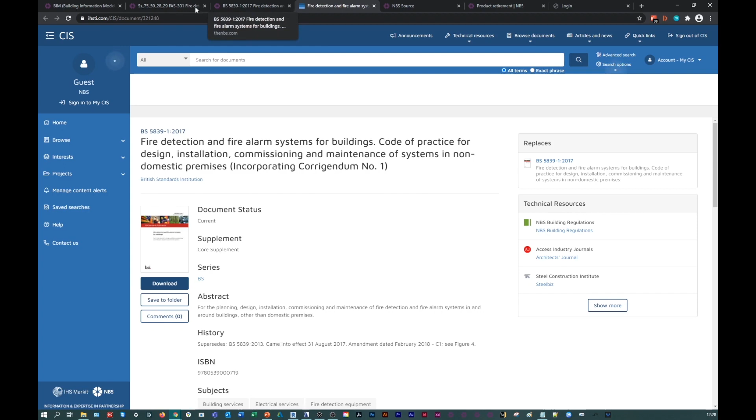You can also view older versions to see what's changed over the years in terms of those particular standards that are referenced. And if you click on this link to download it from BSI and you're logged in and have access to the Construction Information Service, this is a joint venture between IHS Markit and NBS, and we provide access to a number of the standards that are referenced across NBS Chorus and the content you'll find within there. So a really useful way of providing access to those standards and having visibility of some of the information available within the NBS Chorus content.

A couple of remaining things in terms of being able to publish this information. Lots of different ways to approach that. I know the previous webinar did look at style sheets and some of the publication options, so do check that out if you haven't already. But also to mention integration with things like common data environments. So if you have submittals mentioned in your content, they can be exported as tasks and deliverables to things like BIM 360, Format, and Viewpoint.

The final thing in terms of NBS Chorus, I think, is to indicate that there's a huge amount of help and support available. So as you are working through NBS Chorus, wanting some more information, there's support and knowledge base articles to help you through.

You can take e-learning modules that are available to you with an NBS Chorus subscription to learn how to use NBS Chorus. Any support that you need, you can submit tickets directly within the platform, but also the ability to suggest features. So when you think of something that would be really useful within NBS Chorus, you can suggest that to our ideas forum, and those ideas can be upvoted by other users to really inform the development of NBS Chorus going forward. And you can sign up to a newsletter to see what features, like the building and landscape import, are being introduced all the time into the platform.

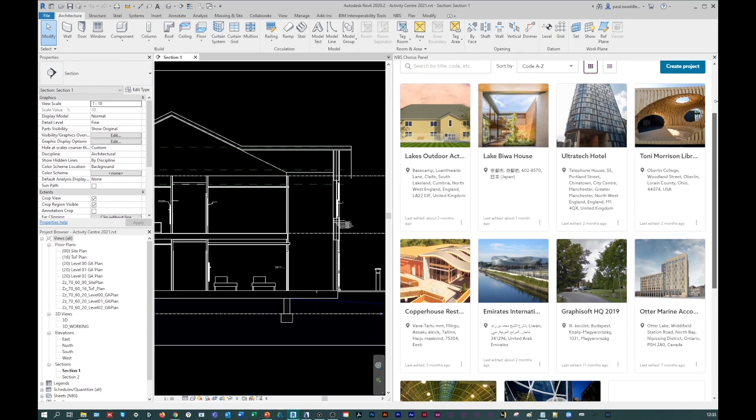The next thing to show you is some of the integrations available with NBS Chorus. One of the key aspects of the power of the platform is in the integrations. So here we've got Revit open, and within the Revit platform, we can now run NBS Chorus within that interface. This isn't like a separate plugin showing a read-only version of NBS Chorus and the specifications you're working on. It's exactly as we saw in the browser view, but with the ability to actually begin associating and linking the information between our model information and what's in our specifications.

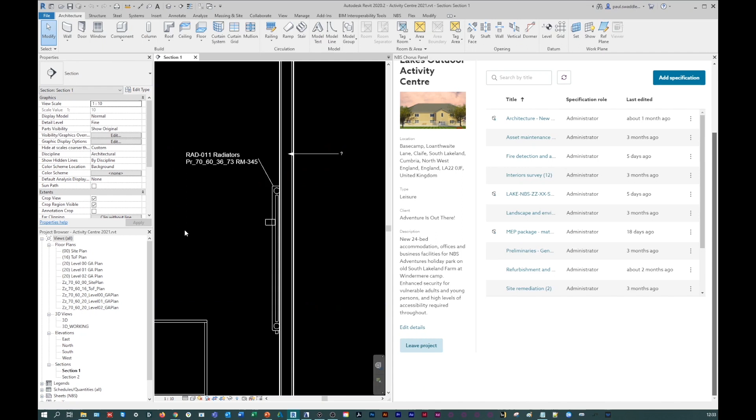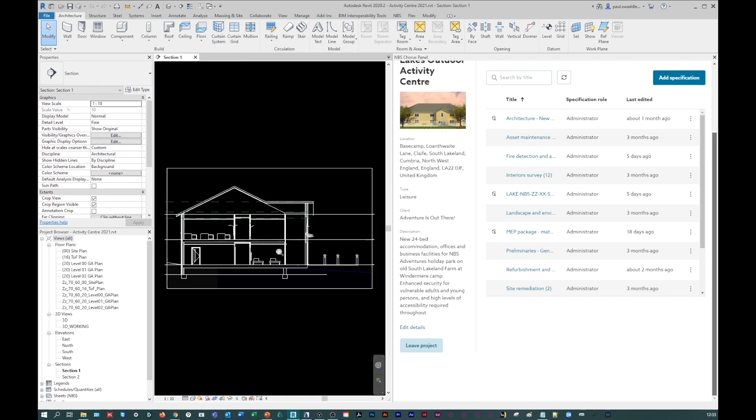So if, for example, I've got annotations and linkages, I can make those across the specification content, and that's for all sectors and disciplines. So the ability to make associations to particular elements across the project at detail level, when we get down to specific products that might be used within particular aspects. And that's true of Uniclass content and our clause content as well, that you can make associations. So here, for example, I've got a wood door that I want to create an annotation to a specific part of my project. I'm going to go here to my spec that has the relevant door sets within it. And here within the NBS Chorus panel for our model integration, there's an additional tab for model information.

You can see here, in family category name order, all of the components that appear in your object model, and start associating those with parts of the specification. I can go into the contents and highlight the object that I want to associate, and then create that association with my model. In this example, I'm using the clause content, and you can see here I've got an existing product clause that I want to associate with this particular part of the object information.

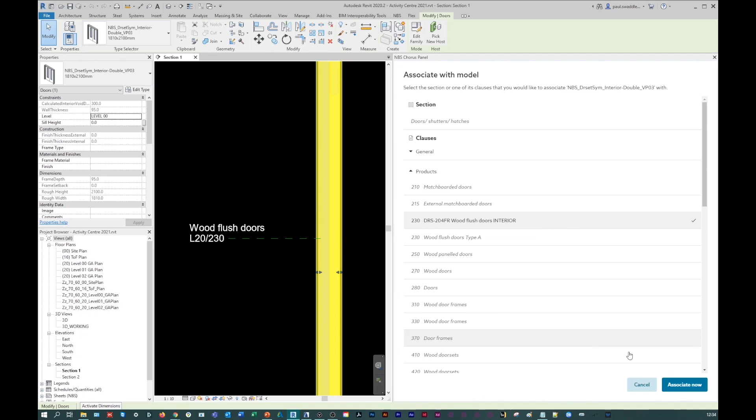When I click associate now, the content will update not only in the specification to show that an association's been made, so that you're beginning that work of integrating that kind of digital audit trail, so that those working in the specification have awareness of what's happening in the model information. But also we can then actually begin to work through the specification data that's relevant to that particular clause.

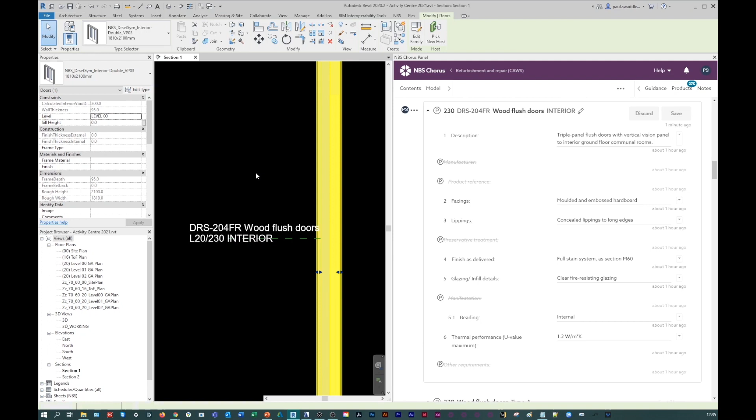So those who maybe have traditionally been spec writers may not have had much information in terms of model contribution, and vice versa. Those who have worked and tended to make design decisions in the model may not be aware of what's happening in the specification. So with the right permissions, with the right access, and the ability to edit and read the specification content, you have a much greater understanding of some of the performance or structural properties of some of the decisions that are being made.

This annotation is then relevant to the particular content you're looking for, so it can be used to cross-reference, to annotate, to associate information. We're doing that because the actual information is embedded within the type clause and the type properties of this particular object, so the parameters are updated, and the clause code and the clause title. That would be true of Uniclass information as well, but you can imagine that that's really useful. And then we can begin to keep that information up to date.

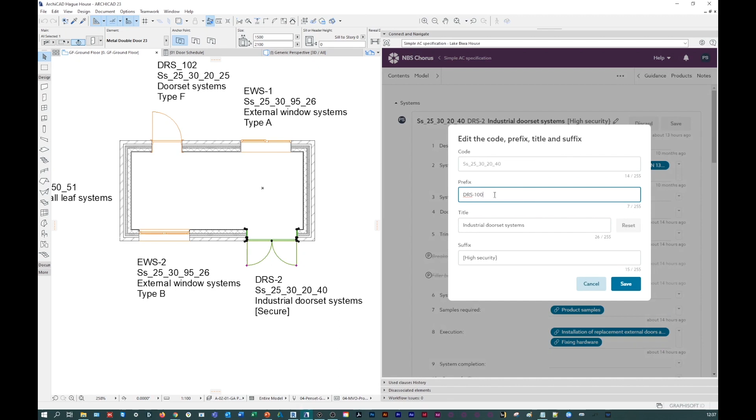So for that purpose, I'll show you ArchiCAD. ArchiCAD works in exactly the same way for a particular object. You can notice here that we can change the content of this, so the prefix and suffix, for example, new information that we were adding as we begin to work through here.

One of the key benefits of the Model tab is the ability to keep these associations up to date. Where the parameters no longer match, we've got the ability to update these. If you watch this annotation here, I can keep that up to date with changes in my specification and keep those annotations true wherever they appear in drawn information, plans, sections, details, and schedules as well.

So there's a real opportunity to have access to the specification and all the information within a particular job, to keep that information up to date, all working within the model interface rather than having to be in a separate desktop product or to work on a separate screen. All of it can be managed and navigated within the NBS Chorus panel here in ArchiCAD.

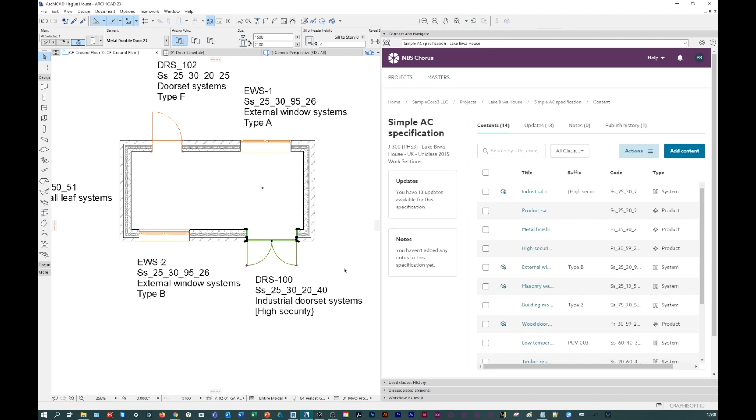And that's equally true in Vectorworks. For those users who are more familiar with styles and classes within Vectorworks, it works in exactly the same way. Here we've got the same situation of wanting to associate our particular door set that we've put into the model, and again the ability to associate.

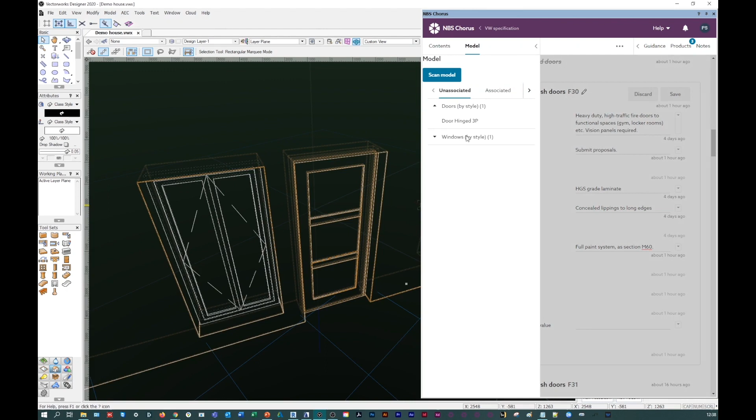So here's our list of items within this particular view, and the ability to associate content for the door set and to associate that with the model, and again choose the relevant door item that would be needed there, and to associate that with part of the specification.

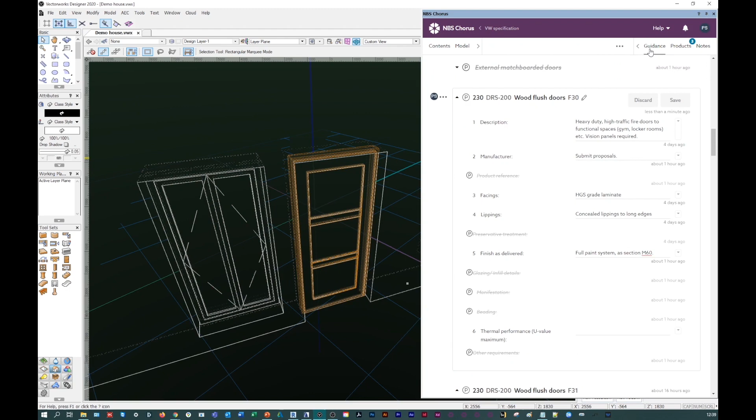And that becomes a tool for navigating as well, so that as items begin to be associated, the NBS Chorus panel will then update to just show the relevant clause as you're working through here. You've still got access to all of the guidance information, products and notes as relevant there to these particular aspects of the content.

Another aspect of that is being able to work directly with the model integration vendors, and that's true of other partners as well. We're working with these particular CAD vendors on the model integration, the common data environment vendors, and developing those reports, and that means that we're getting to contribute to the development of those platforms, to understand how users are operating and developing that information using those particular tools. We'll continue to develop integrations as we work with additional partners.

That's true too of our source platform. So if I search here for aggregate blocks, you may have used NBS product information before through NBS Plus, through the National BIM Library, or accessed CPD from manufacturers. But similarly to Chorus, we're now using a cloud-based platform to bring all of that information into one place.

That allows a couple of things to take place. One is that we can begin to really filter this information. So you can pick manufacturers that you want, pick the ones that have kite marks available, and see different aspects of the properties within there. You can also compare information from particular manufacturers and compare products side by side.

The future of construction is digital. Data is transforming our lives, our work, and the way we create. This is just the beginning. In a world powered by information, how will you deliver better?

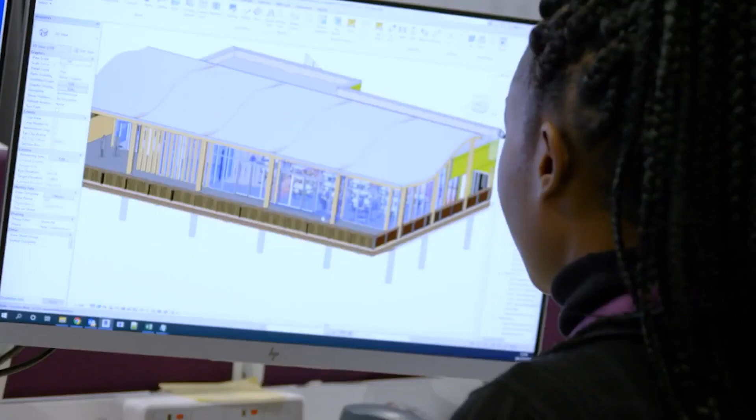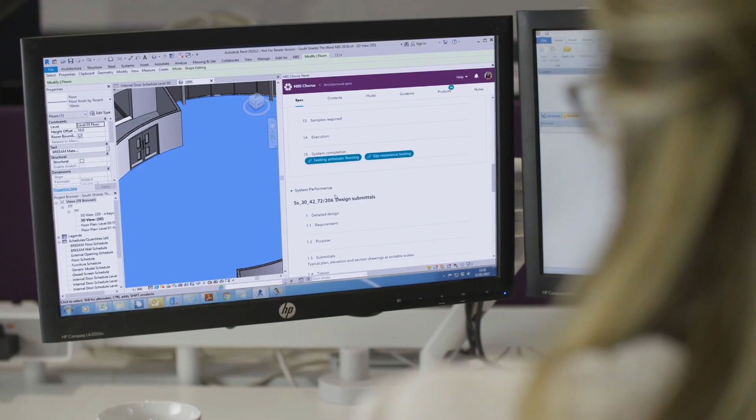NBS is the connected information platform that powers construction. Our mission is to use technology to make the built environment more effective for everyone, giving architects, designers, and engineers the power to specify their projects effortlessly, making sure no details are left to chance. And for manufacturers, NBS is a digital route to market, enabling their products to be selected and providing invaluable insights.

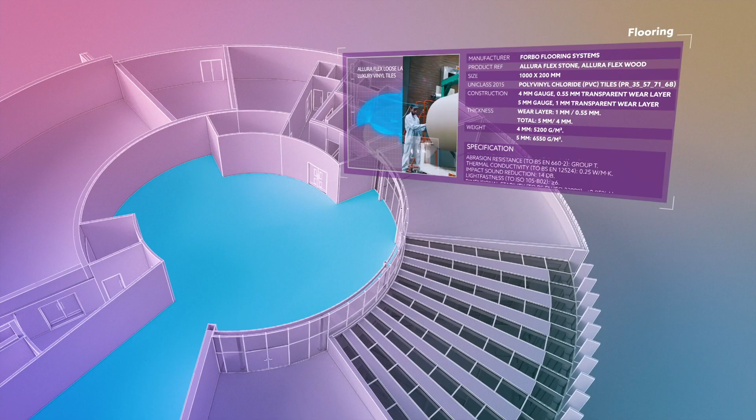Construction is evolving fast. Get ready to digitize and embrace the future together. NBS.